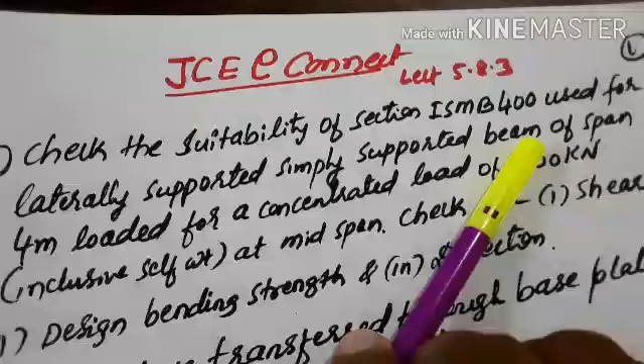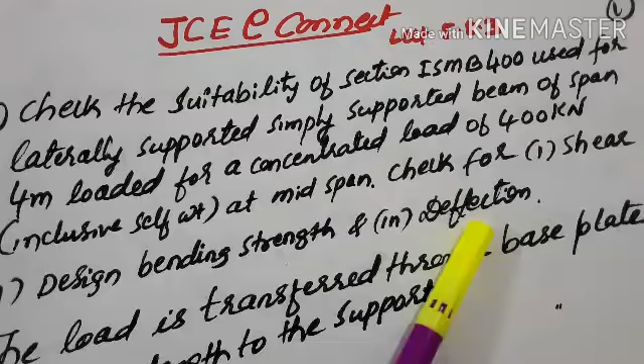Let us take one more design problem. Check the suitability of section ISMB 400 used for a laterally supported simply supported beam of span 4 meter loaded for a concentrated load of 400 kilonewton inclusive of self weight at mid span. Check for shear and design bending strength, and also check for deflection. Then the load is transferred through a base plate of 200 millimeter length to the support. So this is the design problem given.

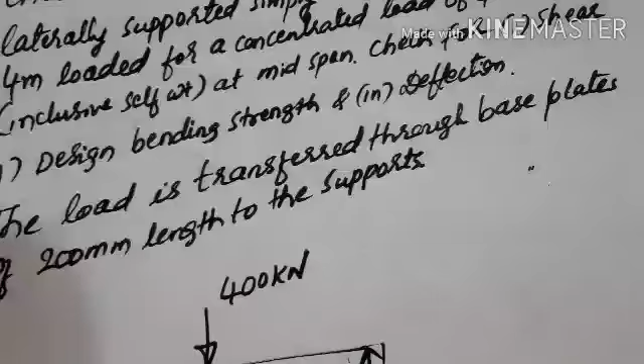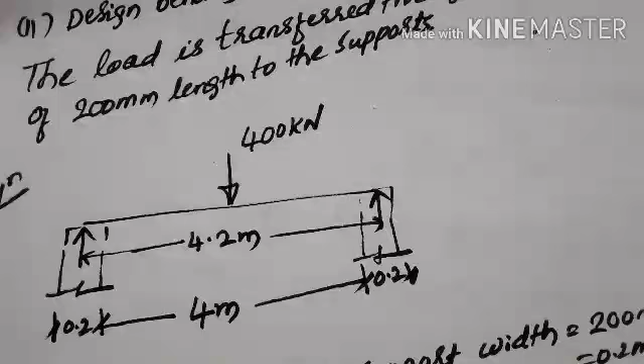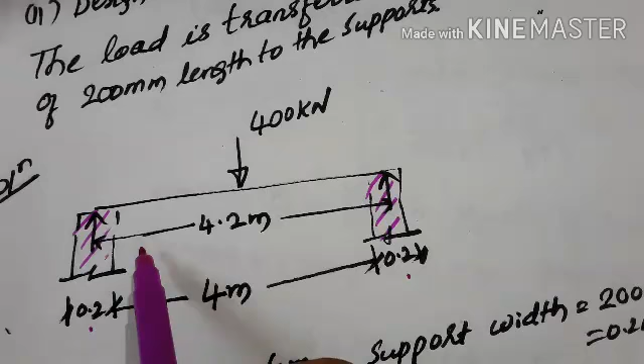A simply supported beam with a centrally concentrated load. The load is concentrated at the center like this. The clear span of this simply supported beam is 4 meter, and at the support, bearing plates are given of width 200 millimeter on each side. Then the effective span of the beam becomes from center to center of the support, that is 4.2 meter. So the clear span given is 4 meter, and with the support width of 200 millimeter, the effective span becomes 4 plus 0.2, which is 4.2 meter, from center to center.

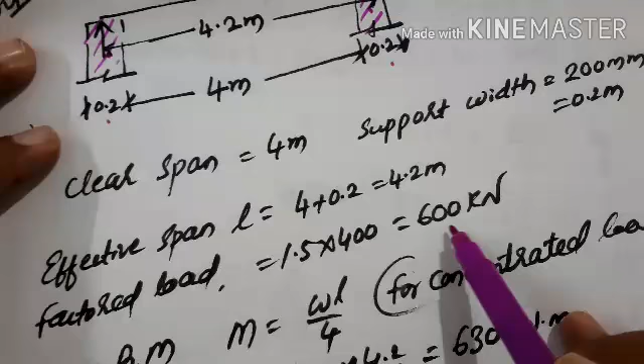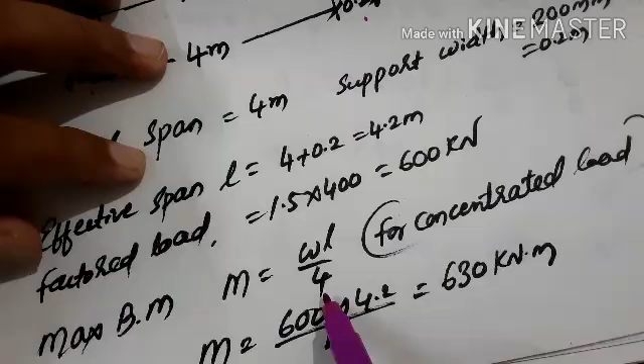Then the factored load, the concentrated load given acting at mid span of the beam, when factored becomes 600 kilonewton. For a simply supported beam subjected to a centrally concentrated load, the maximum bending moment will be WL by 4, and the value will be 630 kilonewton meter.

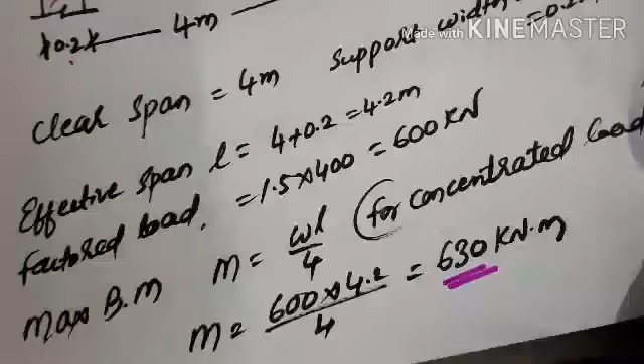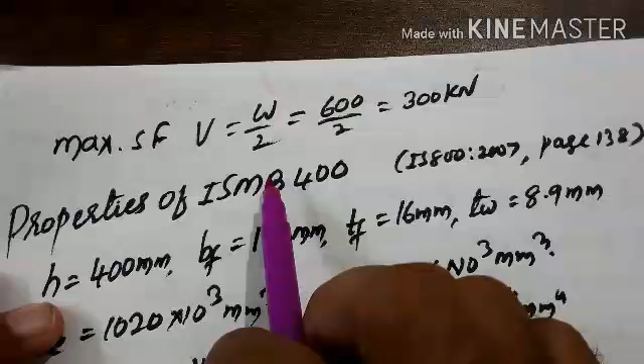Once you calculate the bending moment, the next step is the maximum shear force. As we know, the maximum shear force value will be W by 2 for a centrally concentrated load. Then we get a shear force of 300 kilonewton.

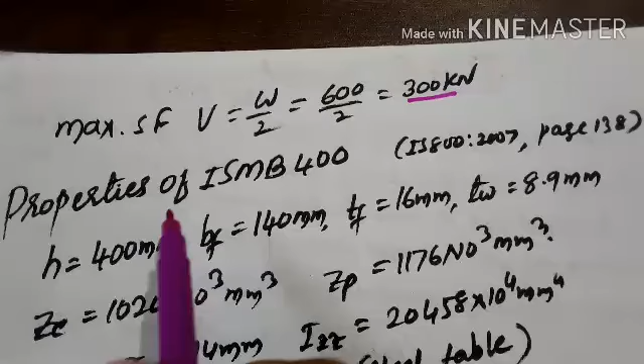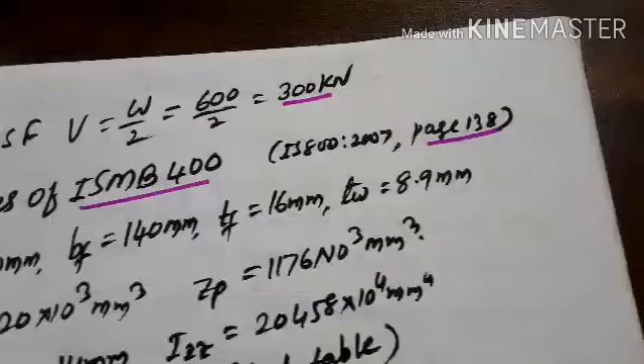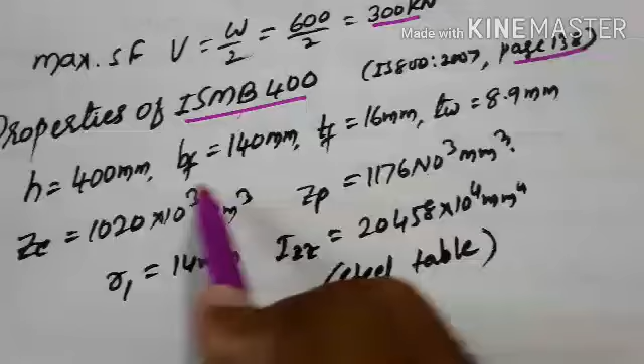After calculating maximum bending moment and shear force, let us take the properties of ISMB 400. You have to refer the steel table, or refer IS 800 2007 page number 138, where you will get the properties of ISMB 400. Since it is mentioned in the problem, you have to take this section. Take the properties: depth of the section, width of the flange, thickness of the flange, thickness of web, and also the elastic section modulus and plastic section modulus. All these you will get from IS 800 2007.

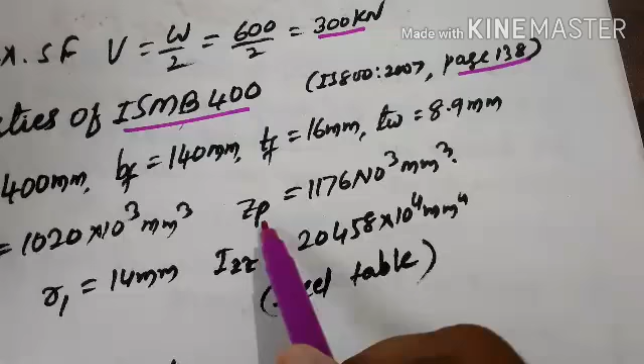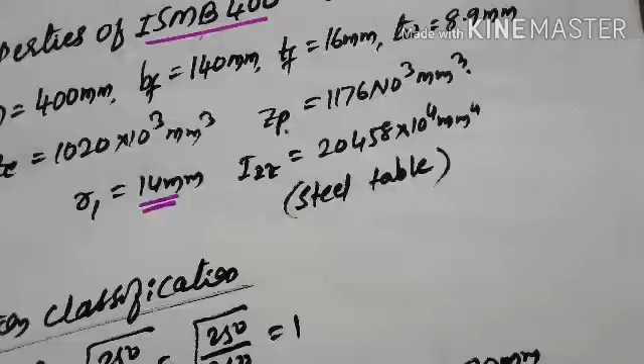Even you can get some properties from the steel table, but except ZP value, which you won't get in a steel table - you have to take it from IS 800 2007 page number 138. R1 and IZZ, that is the root radius of the section, is 14 mm - for this you have to refer the steel table. Also the moment of inertia about the major axis, IZZ, you have to take from the steel table. This IZZ is required when you check for deflection.

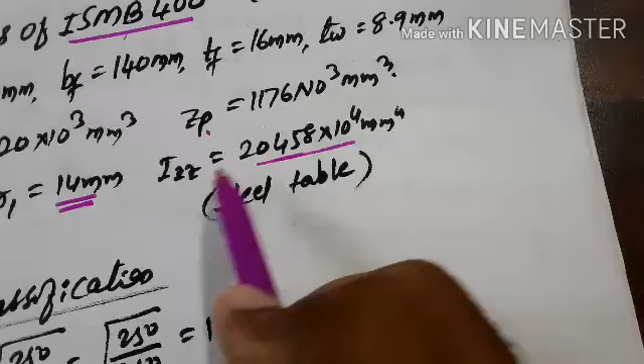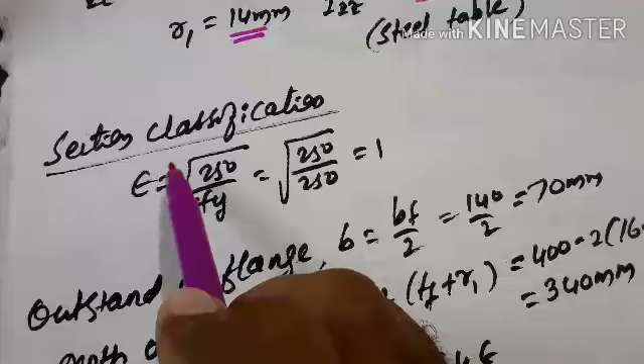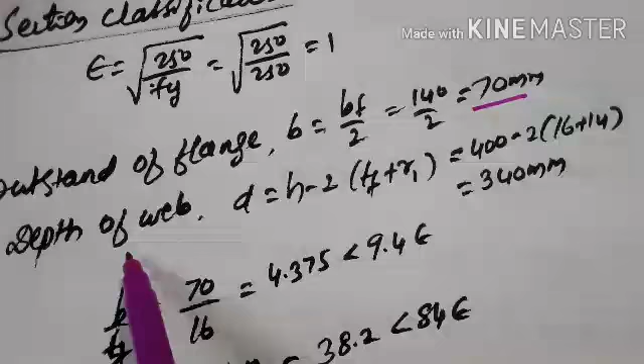Once you've noted down the properties of the section, the next step is the section classification. You know how to do section classification - the epsilon value is to be taken. Then the outstand of flange width, this you have to calculate for section classification. Similarly, depth of the web - 400 minus 2 into bracket 16 plus 14, so this much you will get.

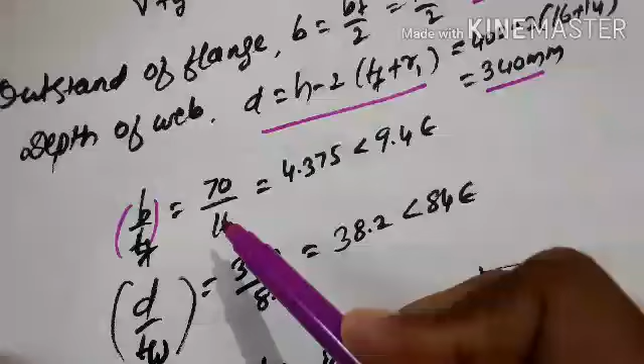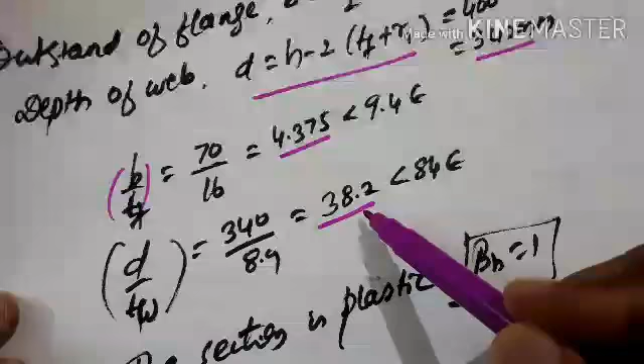Then you have to calculate the ratios of flange element as well as web element, and compare these values with the permissible values in Table 2 of IS 800 2007. This is less than 9.4 epsilon, and the depth-web ratio is 38.2, which is less than 84 epsilon, which represents the section. The given section is a plastic section, and for a plastic section beta b is 1.

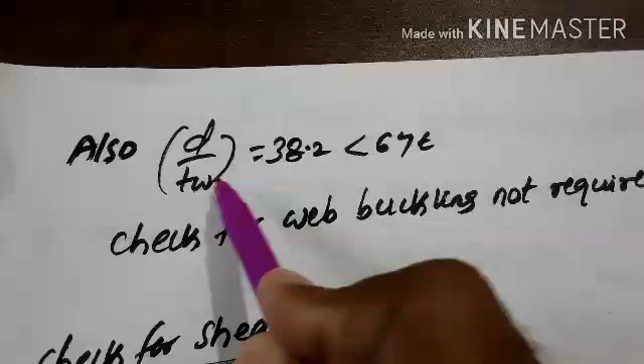So after section classification, one more check you need to do is whether the web buckling check is required. For that you have to take the ratio of web depth to thickness, which should give less than 67 epsilon. If it does, it means the check for web buckling is not required.

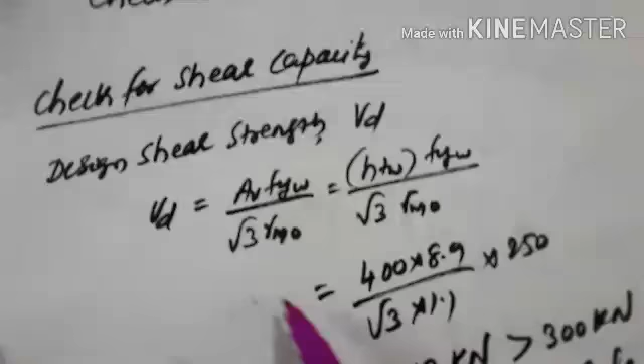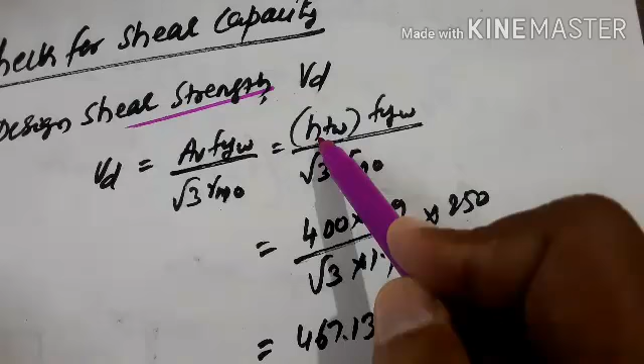Then next is a very important check, the check for shear capacity. For that you have to calculate the design shear strength. The formula is Vd equal to Av into fyw divided by root 3 into gamma m0, where Av is the shear area. Then calculate the shear area, where H is the whole depth of the section, into thickness of web, into yield stress of the web material, divided by root 3 into gamma m0, and substitute all the values here.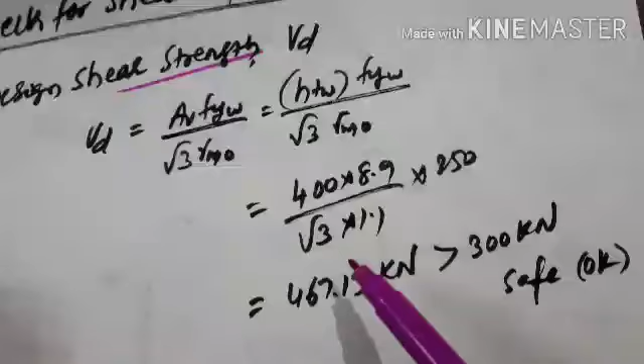You will get the design shear strength, and this design shear strength is greater than 300 kilonewton, which is the actual shear force acting, hence it is safe.

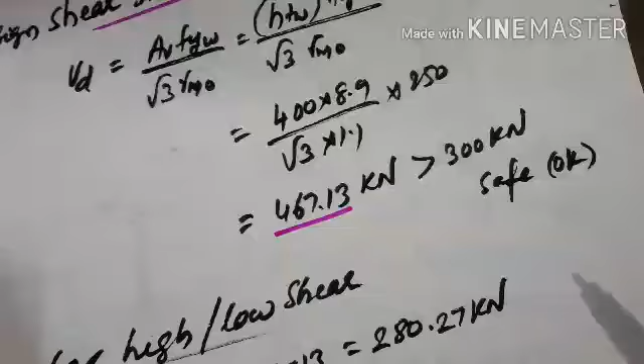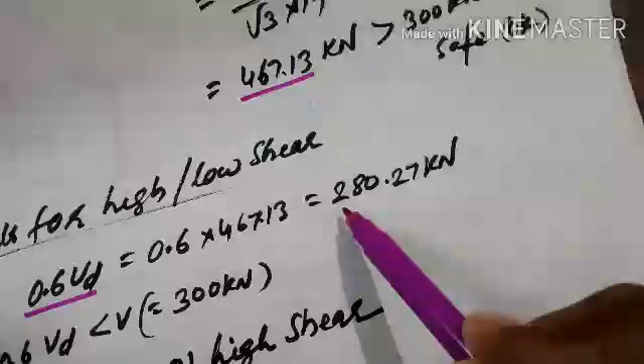Then check for high shear or low shear, whether the given section lies in high shear or low shear. For that you have to take 60% of the design shear strength, and 60% of the design shear strength we get 280.27 kilonewton. Since 60% of the design shear strength is less than the actual shear force acting, it means this case is of high shear.

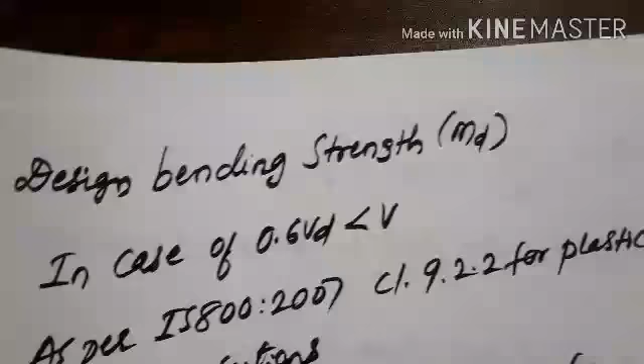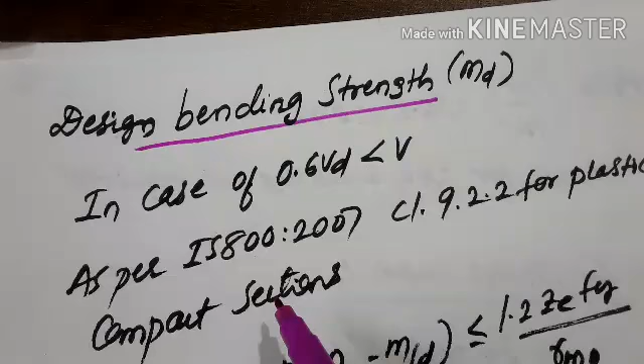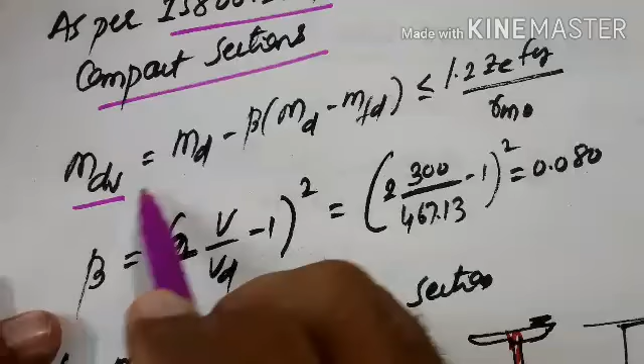For the high shear case, since the shear is high, the design bending strength has to be calculated using the formula for high shear case, that is 60% of Vd is less than V, as per IS 800 2007 clause 9.2.2 for plastic and compact sections. In case of high shear, the design bending strength can be calculated using this formula: MdV equal to Md minus beta into bracket Md minus Mfd, less than or equal to 1.2 Ze into fy divided by gamma m0. That is given in clause number 9.2.2.

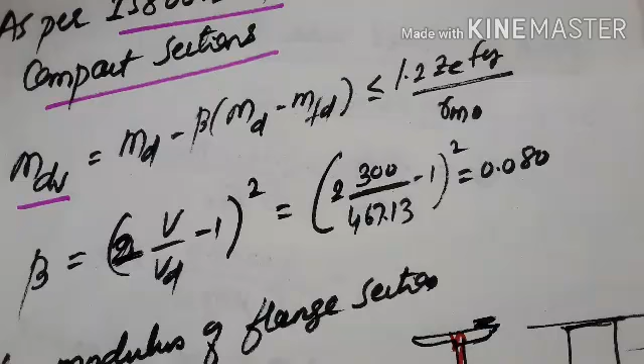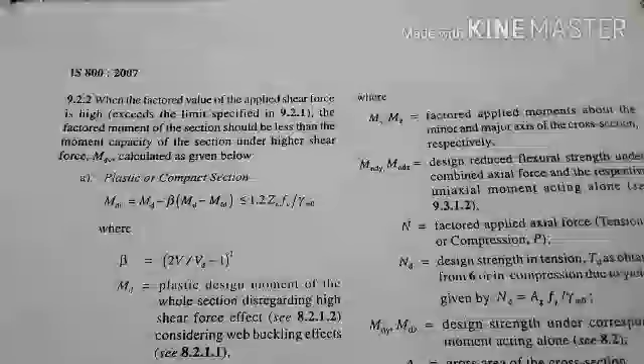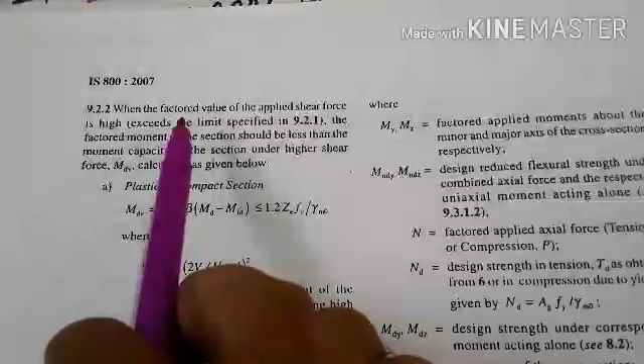Just I will show you 9.2.2. So here it is given, just to refer the code for a plastic or compact section. If it is the case of high shear, the MdV is given when the factored value of the applied shear force is high and exceeds the limit specified in 9.2.1.

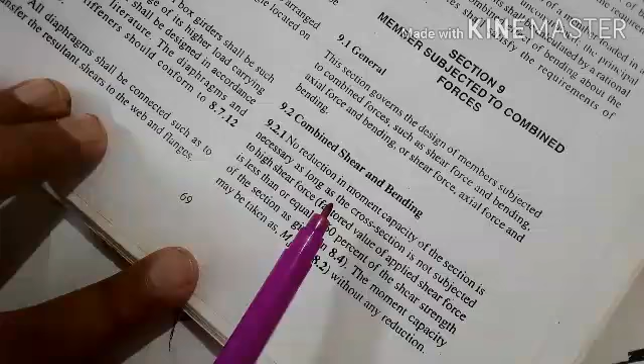So let's refer to 9.2.1. I'll read it again. 9.2.1: combined shear and bending - no reduction in moment capacity of the section is necessary as long as the cross section is not subjected to high shear force, that is, the factored value of applied shear force is less than or equal to 60% of the shear strength of the section as given in 8.4.

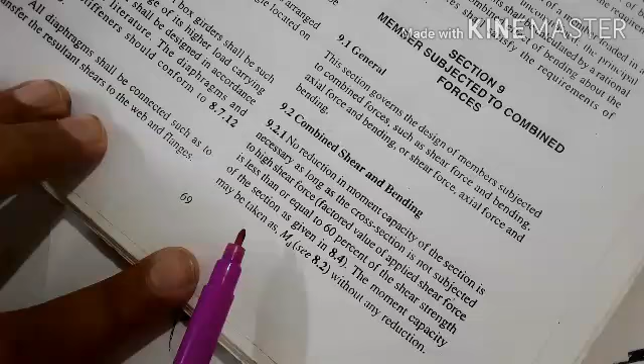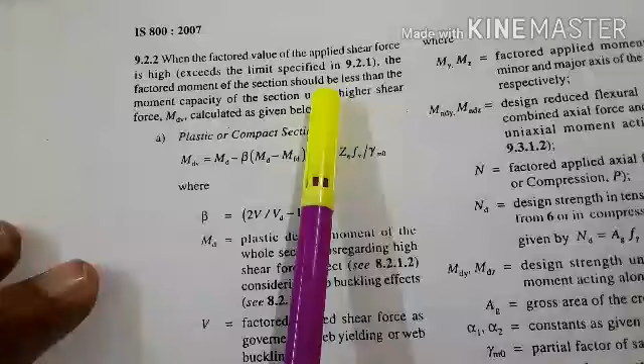The moment capacity may be taken as Md per clause 8.2 without any reduction. But the next clause, 9.2.2, states when the factored value of the applied shear force is high and exceeds the limit specified, then the factored moment of the section should be less than the moment capacity of the section under higher shear force, MdV, calculated as given below.

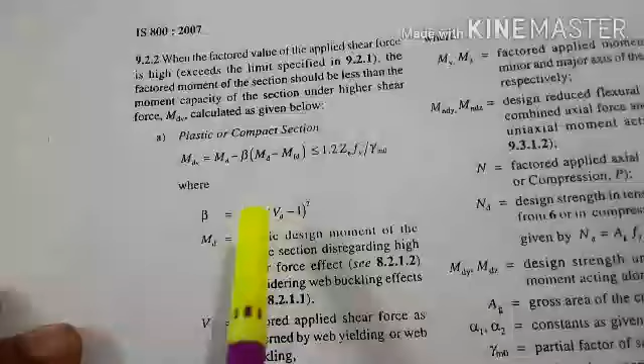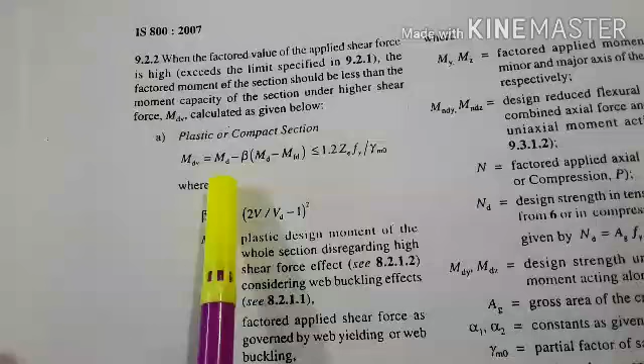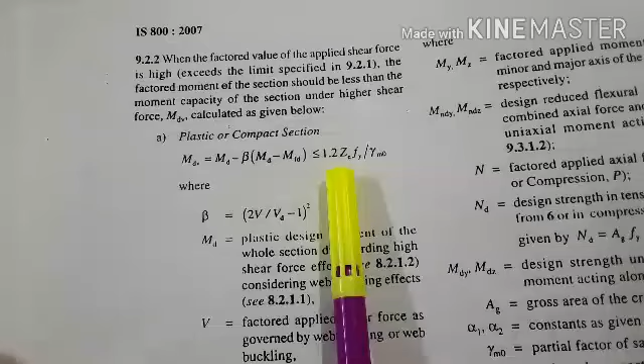Okay, then this is the formula to be used to calculate the design bending strength MdV. So refer to page number 70, if it is the case of high shear. Then how to calculate Md, beta, or Mfd is all given on page number 70 of IS 800 2007. And this MdV value should be less than or equal to 1.2 times Ze into fy by gamma m0.

Okay, so here I calculated that one. So MdV, this is the formula I have used, and the beta value to be calculated, that is beta equals 2 times of V by Vd, minus 1, whole square.

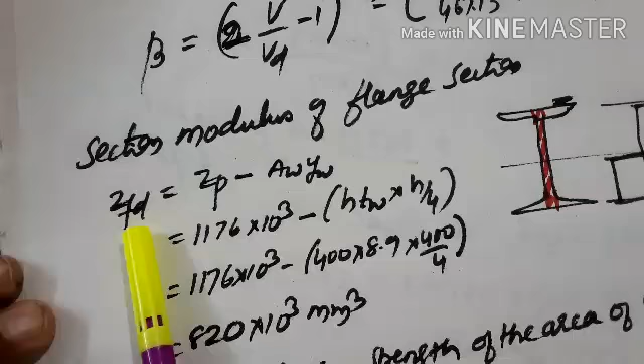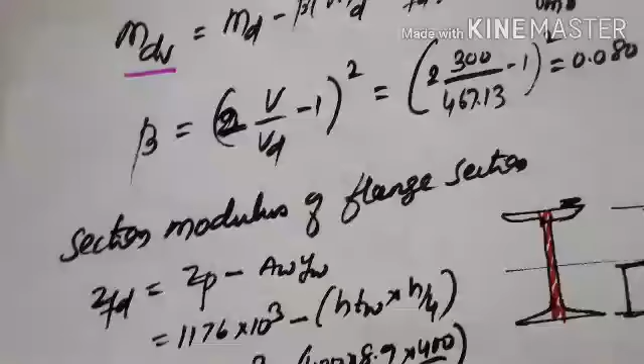300 divided by design shear strength gives this beta value. Then the section modulus of the flange section, ZFD, you have to calculate. This ZFD is required to calculate MFD, the plastic design strength of the area of cross section excluding the shear area.

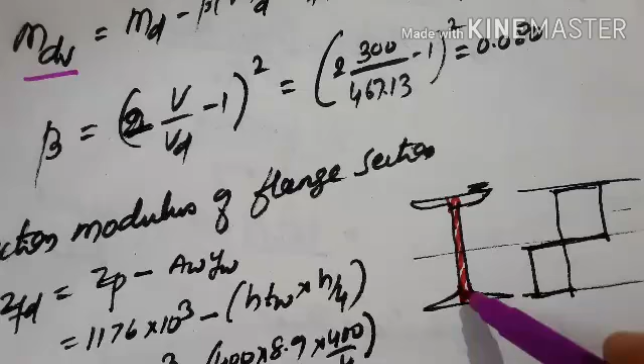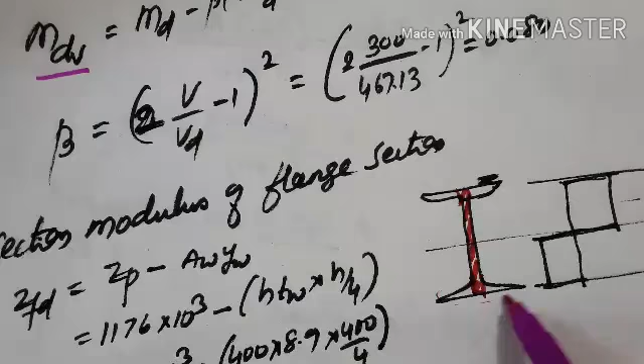When you calculate ZFD, you take the plastic section of the whole section minus this much shear area. The section modulus of only the flange section needs to be taken. This is the section modulus for the flange section only, so you have to deduct the web area.

Since this entire section is considered as a plastic section, it has formed a plastic hinge. On one side you will get tensile stress and on the other side compressive stress. The stress acts at the centroid of the section.

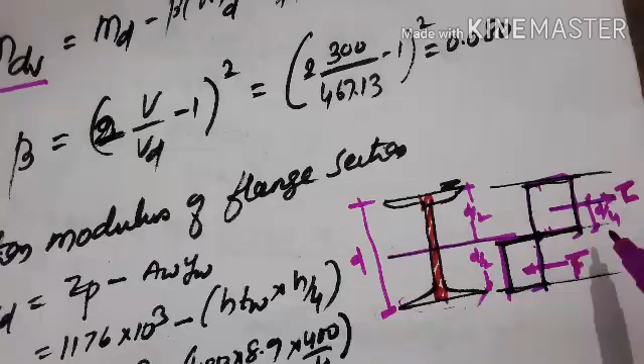If I take the entire depth as D, then at the centroid this is D by 2, and this is also D by 2. But this compressive stress will be acting at a distance of D by 4.

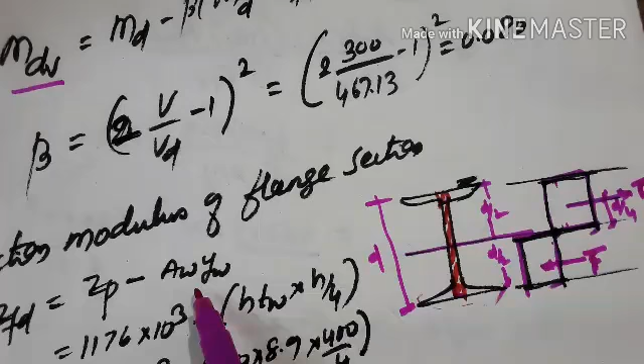Then you have to take the area of web, that is H into TW, area multiplied by H by 4.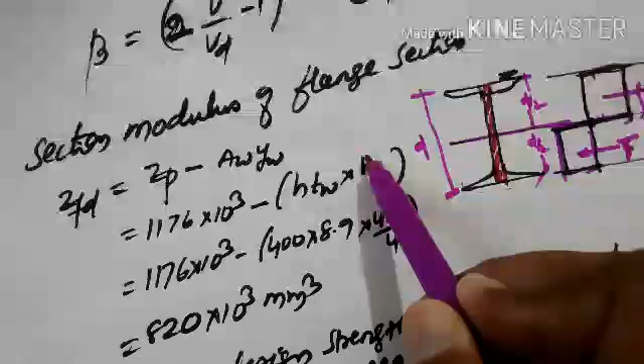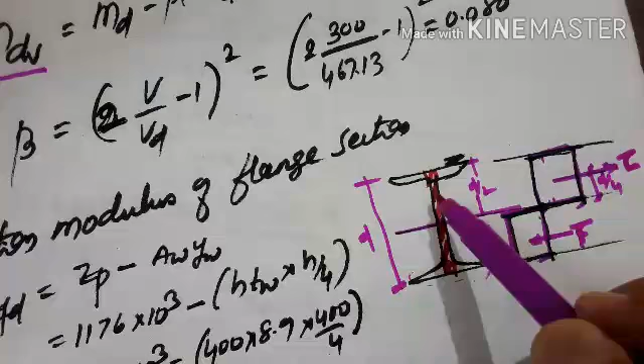Substitute the values here, using this formula. Plastic design strength of the area of cross section excluding shear area - so you have to deduct this shear area. For that, H into TW, area multiplied by 1/4.

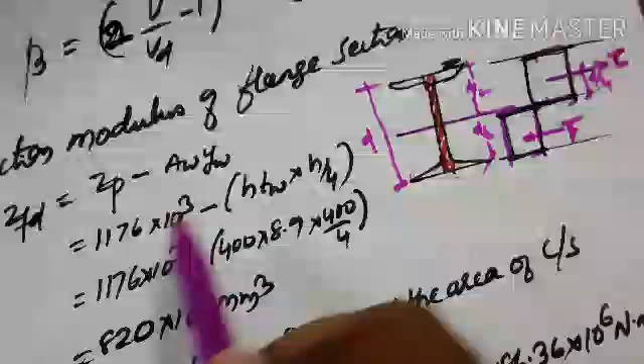So to calculate the ZP value, you use H by 4. I hope you understood this one.

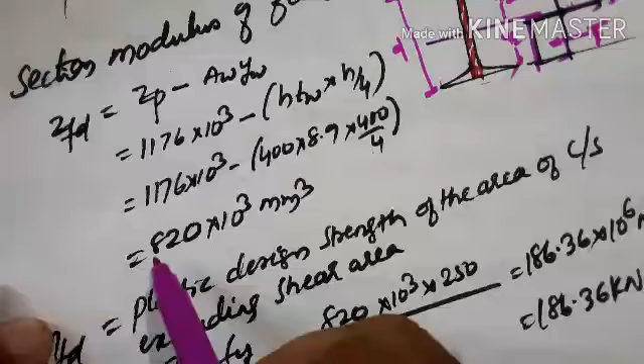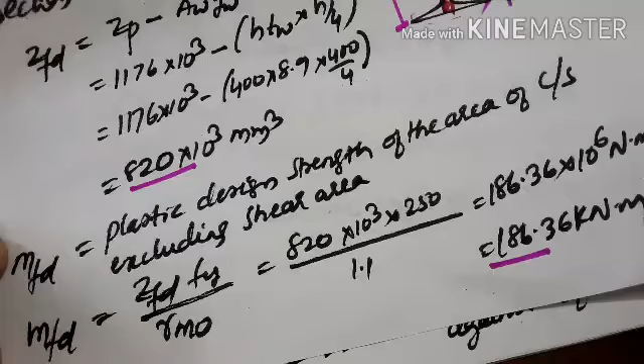Then ZFD you calculate, then MFD, formula is MFD equals ZFD into Fy divided by gamma MO. Then you will get this much as the plastic design strength of the area of cross section excluding shear area.

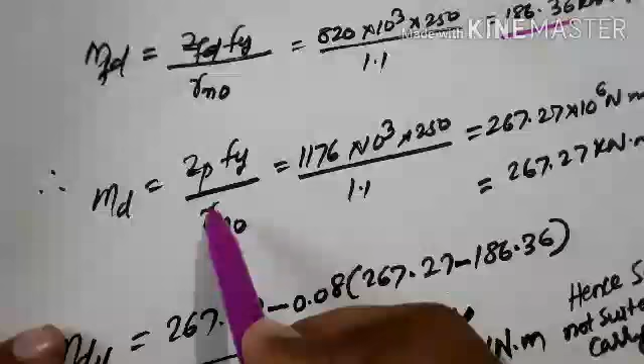Then MD is to be calculated, MD is ZP into Fy by gamma MO. Then you calculated MD, this much you will get. Then MDV is finally calculated. Substitute all the values in the above equation, you will get MDV as 260.79 kilonewton meter, which is less than the actual moment acting.

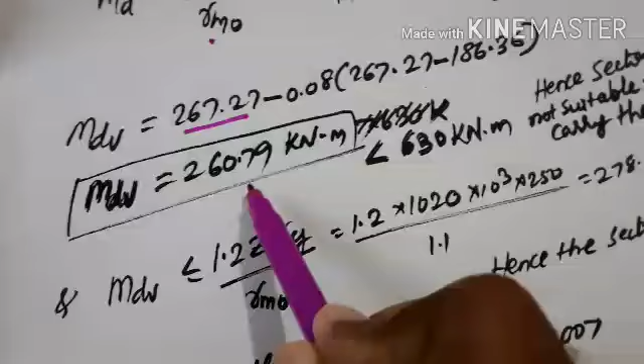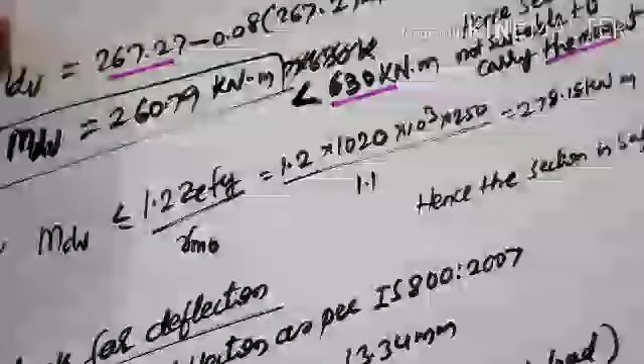Hence we can say the section should be revised, and the section is not suitable to carry the moment because it is less than the actual. The section is giving this much moment, but the actual moment acting is 630 kilonewton. Hence the section is not suitable, else the section can be revised.

MDV should be less than or equal to this value for the section to be safe when compared. But the actual moment acting is this much, hence the section can be revised.

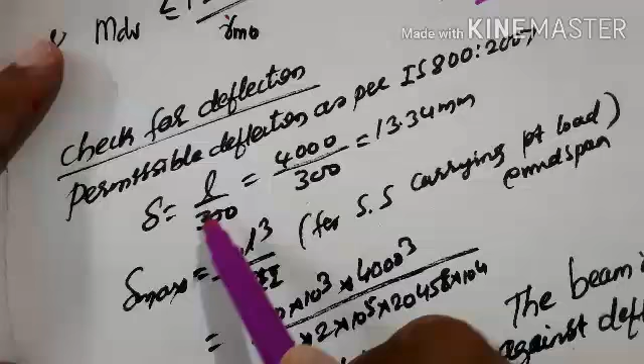Also you have to do the check for deflection. The permissible deflection as per IS 800 2007 is L by 300. So this much we get.

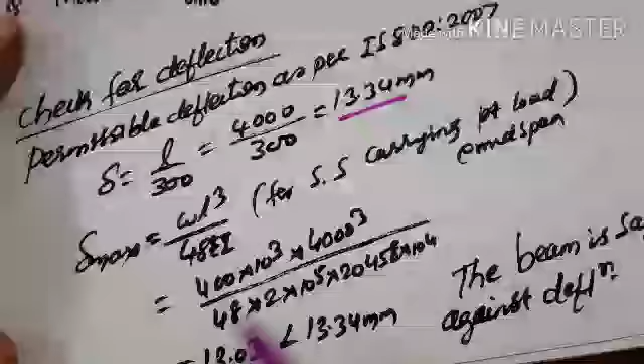The delta max will be WL cube by 48 EI, this is for a simply supported beam carrying point load at midspan. So delta max will be this much, which is less than the permissible value. Hence the beam is safe against deflection.

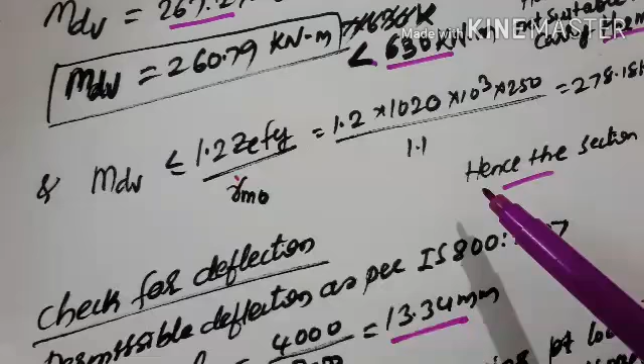So this beam is safe against deflection, but it is not safe against moment carrying capacity. Hence the section is not suitable. So you can write a comment: hence the section is not suitable. I hope you understood this one.

So this is the high shear case. We have solved the low shear case in previous lectures, and this case I have taken as a high shear case.